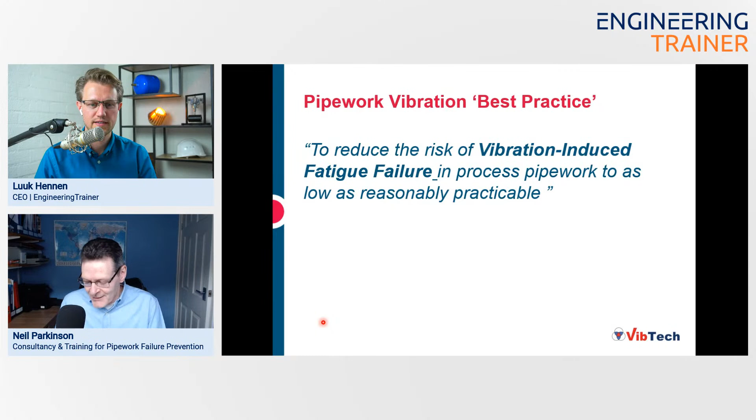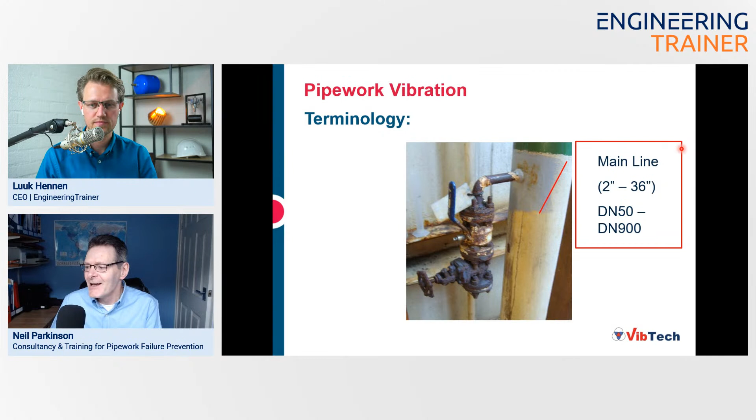Just some terminology which might be useful when talking about pipework vibration. This is an example of a small bore connection connected to a main line. The main line typically would be anything from 2-inch to 36-inch. I apologize for using inches, I know we went metric decades ago, but the small bore is still usually referred to in inches for diameter. When we've got a branch connection, we sometimes abbreviate this to SBC, small bore connection, sometimes called a small branch connection. That's something between 1/2 inch and 2-inch in branch diameter, and this is where most failures occur in pipework vibration. It's not the main lines themselves that fail, it's these welded connections between the small bore connection and the main line.

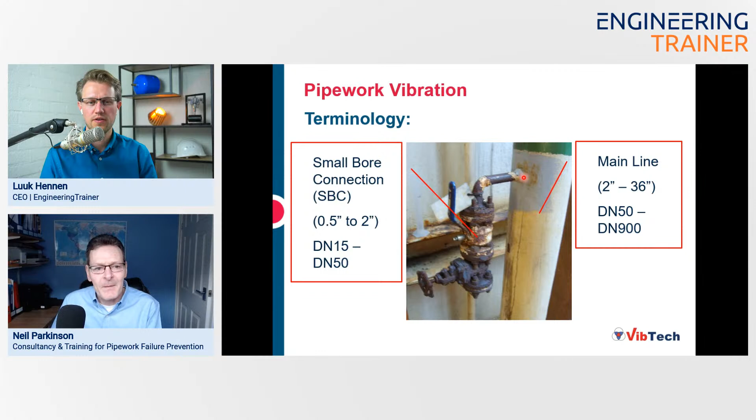This picture shows it perhaps a bit more clearly. We've got the small bore connection, and it normally has a fitting of some type, so a weldolet fitting would be very common. You'll hear that term a lot, but it could be a threadolet, a sockolet, a nipoflange, and lots of different types. It's got a welded connection with some type of fitting, connected to a number of valves, so it's got mass. It's like a cantilever, with a large mass supported just by that small diameter pipe.

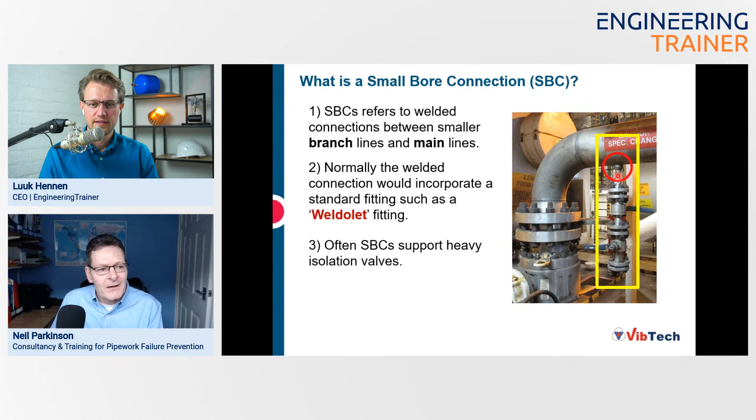Now here's a picture, I'm going to run this video in a second, but this is a motion amplification video, which is very good for explaining the problem. This has been amplified. Motion amplification is a video technique where you record a video where you can't see any movement, then you can amplify that movement and replay the video, showing it with greater visualization.

If I turn off my laser pointer and run this video, you'll see this small bore connection moving from side to side and leaking because of a fatigue crack at that weld. The interesting thing is that everything on this image is being amplified by the same amount, so the main line vibration is also amplified, and even then you can't see it. That's an important point, because some people think pipework vibration only happens with really extreme levels of vibration, so they assume it's probably visual, that you could visibly see it, where in fact you can't. Even when amplified, you can't always see it.

These are small levels of vibration that happen in normal processes. We're not necessarily talking about fault conditions, although it might make it worse, but normal levels of vibration caused by the flow of fluid through your pipes, caused by the type of machinery driving that fluid, caused by the operation of valves. They can cause vibrations of the main line, always of the main line, they don't excite the small bore directly. Could you see the vibration of the small bore connection with the eye? No, that'd be totally invisible. If you put your hand on it, you'd feel some vibration, but you wouldn't see anything at all. You'd need a vibration meter to quantify it, but that's why motion amplification is such a great technique. So these small levels of vibration are caused by normal process conditions which excite the main line, and it's the main line vibration that's causing the small bore to vibrate.

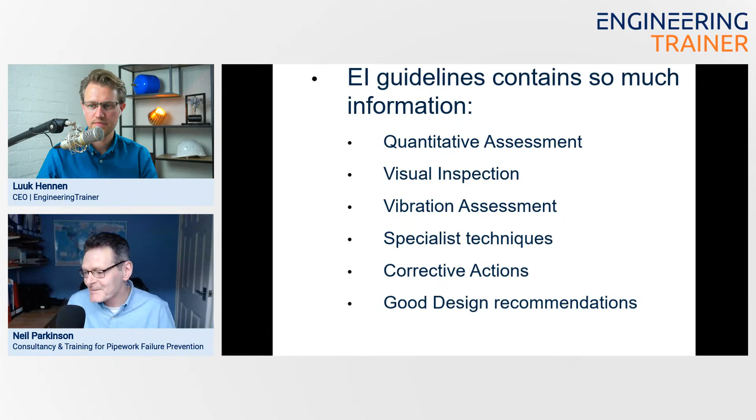Because we're talking about vibration, there are techniques for how to measure the vibration, and how to assess what that actually means. What's an acceptable level of vibration for our pipework? That's all covered in the guidelines.

And then, if you've got a problem, you want to assess it further. Just because the vibration's high, you may still be okay. You have to assess it further using some specialist techniques.

They might be things like finite element analysis, being a very common one. You might want to do some modeling to try and predict the behavior of pipework and look at how I can improve it. If I put an extra support here, is it going to have the effect I want it to have? That sort of thing.

And also it tells you, if you have got a problem with vibration, what are the common corrective actions? What should you be doing to fix it?

And this is a good... Are these likelihood of failure assessments common these days during, let's say, design stages for every meter of pipe? Some of them are.

Routinely, I've been involved in lots of new build projects in the Middle East, and routinely they'll do flow-induced vibration assessment and an acoustic-induced vibration assessment. But that's all they'll do, and they'll do that at the feed stage. But for lots of existing plant, it might never have been done.

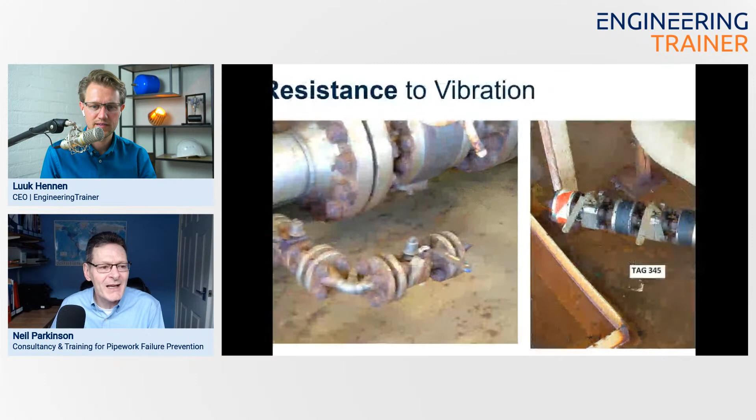There's got to be a root cause of the vibration, hasn't there? There's got to be something that causes it. So it may be that during normal operation, if I measured vibration on one of these small bore connections—there's one here, and there's another example here—they might be perfectly okay. If I put a vibration meter on, the vibration might be acceptable.

But every time you close a fast closing valve, this thing might see a lot of vibration. And that's what Luuk was saying at the start. It could be that it's seeing this low cycle fatigue. So every few days or weeks, it sees some high stresses, which over time can still lead to a failure because it's got low resistance to vibration, which means it's vulnerable to transient events.

Yeah, it clearly looks like a very top heavy section of piping. I mean, you have this really small bore branch, and then these thick flanges and thick valves. It's really hard to avoid coming up with a piping geometry or routing that solves the issue with such a high mass of the valves compared to the thickness of the piping.

Well, it can be difficult, and I think a lot of people get put off by complex geometry, thinking: well, if I had to try and design a brace to fix this—some of these are quite simple compared to some of the ones you might see—it is going to be off-putting.

In actual fact, I'll show you a bit later on some examples of a very easy off-the-shelf solution where, with just 2 dimensions, you can order some bracing that would fit any small bore connection. You buy it as a kit and fit it yourself, so it's actually very easy.

Another thing I should say about these is the vulnerability, we can calculate that using this quantitative assessment tool in the EI guidelines, the likelihood of failure. It uses a number of factors, but what it doesn't use is how many bends there are in this, whereas the bends are actually quite important.

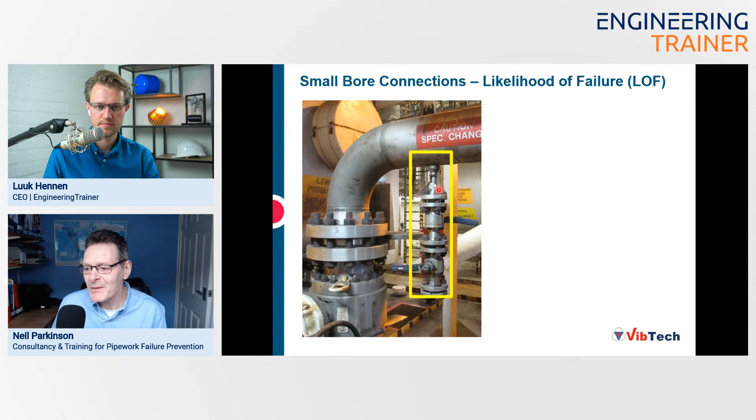But what the Energy Institute lets us do is calculate this likelihood of failure factor, using just 6 parameters. So this is our small bore connection - our valve arrangement on a pipe welded to a main line.

So the main line wall thickness has an effect - the thicker, the better. The type of fitting, I mentioned a weldolet fitting before, that's a common one, and that would have a score of 0.7. You have a score for each of these 6 factors, and then you average those out at the end. The fitting type - some have a better fatigue endurance than others, the weld geometry is different and the fatigue performance is different.

Then the branch diameter - the wider the better. The number and size of valves is important, basically the mass that's supported on this cantilever. And the overall length.

Now actually a lot of these parameters - the length, the mass, the diameter, and the thickness of that parent pipe - all of those same factors are the same factors that alter the natural frequency of that small bore connection. If it's very long with a big mass, a small diameter, and a flexible connection onto a pipe because it's thin walled, it's going to have a low natural frequency. That will give it a high likelihood of failure factor, and a low natural frequency.

And that's why most of the problem vibrations on small bore connections tend to be low frequency ones, because the low frequency ones are the ones with the poor geometry, which make them vulnerable. It's exactly the same effects.

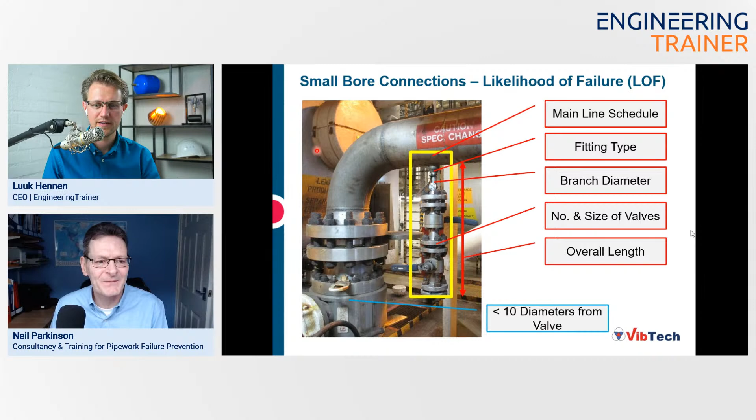So we take those 6 effects, and that will give us our score - that's just how it's calculated for a small bore connection. The next of the 6 is the 4th one I've got here on my list - these are small bore connection braces that are ineffective.

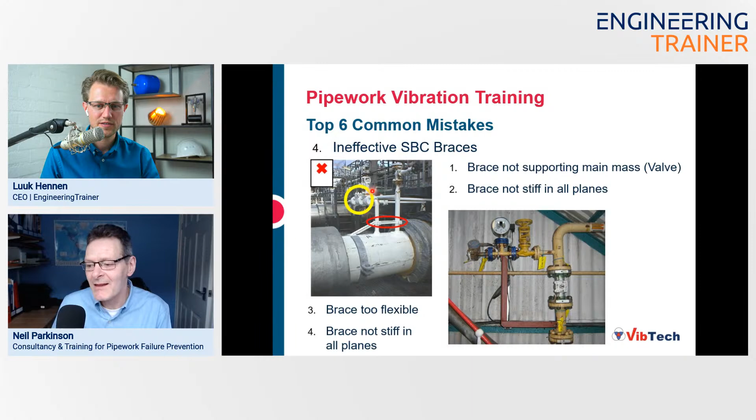So on this left-hand picture here, we can see - could you zoom in maybe a little bit? Yeah, I can zoom in on that. So...

What we can see is we've got a small bore connection with some valves, and the solutions are always the same - we always want to stop the valves moving because that's where all the mass is, and that's where all the energy is in the system. So if we brace it, we always have to brace to the valve, and we always want to tie it back to the parent pipe, the pipe that it's welded to.

Someone's gone to a lot of trouble on this picture to have a clamp-on brace solution here. It clamps onto the main line, and it's got an arm that tries to connect lower down. You can see what they're trying to do. They're trying to protect the welds around that weldolet fitting, like bending at that location. They're thinking, I'll try and stop it moving at that point because that'll keep the stresses low in those welds, but it won't. If this small bore is vibrating, the energy of these valves vibrating will transfer down this small bore connection and into those welds still.

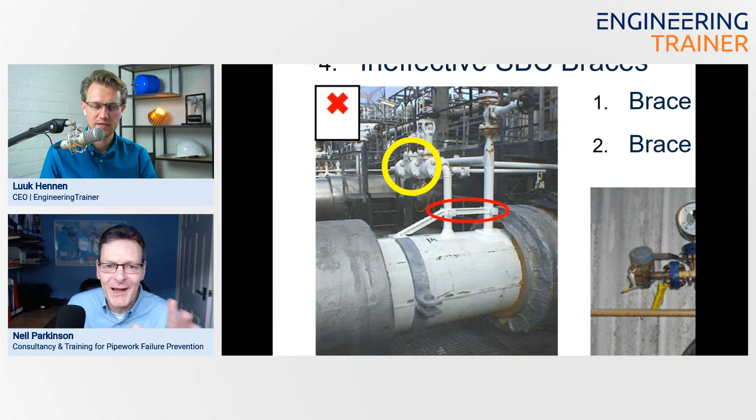But also, if you are going to clamp it, it's got to be effective in all directions, in all planes - for side to side, for vertical, even all the X, Y, and Z planes of movement. It's got to work in all of them.

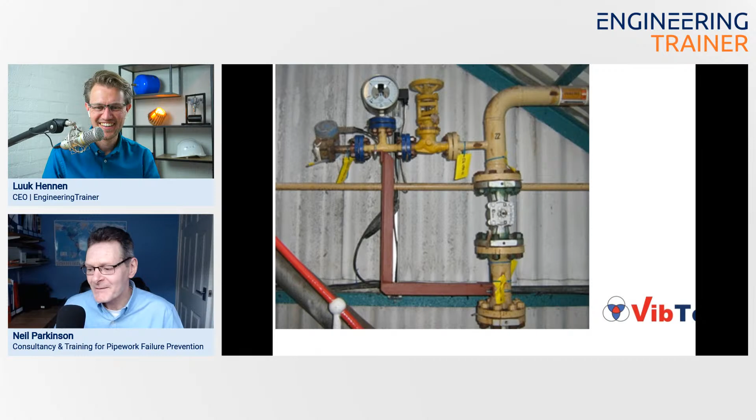This other picture you can see here, it looks a bit pathetic. It's got a brace that's got bends in it. I'll just put the pointer on. It's got a U-bolt connection onto the small bore, and a U-bolt connection onto this - I call it a main line. It's quite a small diameter, but it's trying to stop this valve from moving.

So the vertical red and horizontal red sections, those are the clamps. Someone's designed those, and just like I said, if a small bore connection has got bends in, it makes it more flexible. It's the same for bracing - if it's got bends in, it's more flexible.

What we want to see here is a diagonal straight line. Always diagonal - whenever I see any bracing, I'm always looking for diagonals. If this valve tries to move vertically now, it's got to change the length of this yellow strut that I've drawn on. It's got to load it in tension and compression, whereas on their design, it's just got to load it in bending and a bit of rotation on this U-bolt. So we always want these diagonals to give it high stiffness, but even that wouldn't work in all directions - for side to side, like in and out of the screen, it's doing nothing. So that's an example of one someone's fitted, but it's going to make no difference.

As a rule of thumb, we want our brace to be 10 times stiffer than the small bore connection is on its own without the brace, which means it normally has to look quite over-engineered to be effective.

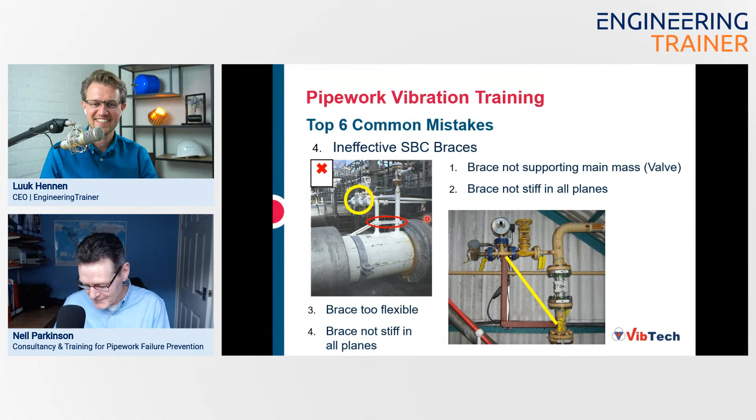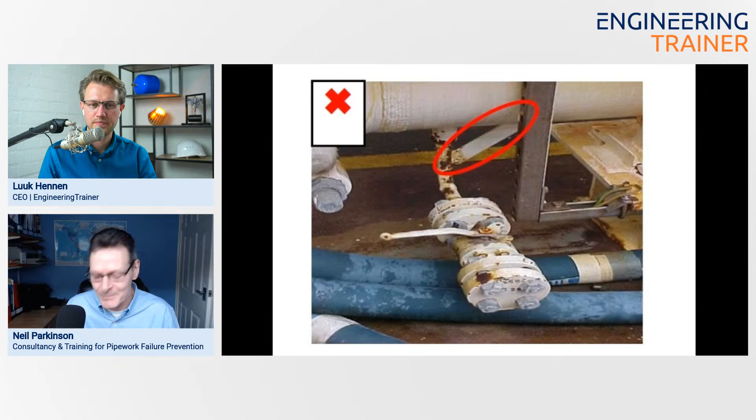You can still have gusset plates - they're not totally best practice now, but I've done something crazy.

Hang on, I'll get you back. Sorry, just bear with me. No worries, take a second. There we go, there we go. Back in the room.

If you have got a welded gusset plate like this one, you need to use a reinforcing plate - that's what the guidelines will tell us, to reduce the stresses in those welds to stop those from cracking. But it's still not effective in all planes; it just means it won't be damaging if you put that reinforcing plate in. The best way to do this, like always, is to support that valve back to the parent pipe - the main line.

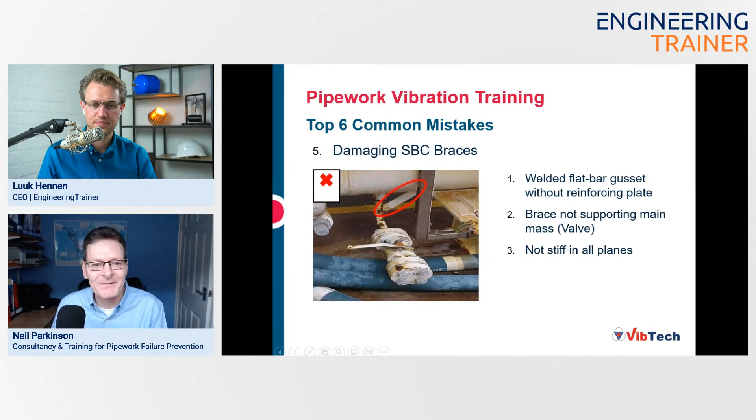Just to be sure, like Neil, we're advancing rapidly in time, as always. Okay, well that's good, but no worries. It's really interesting to discuss these pictures. We have a few slides with pictures, let's focus on these and then start wrapping up.

This is an example of a small bore connection near the ground. They've put a bend in it because there's not enough space for a straight line. And because they want to stop it vibrating, they've fixed it to the ground, thinking, what can be better to stop that from vibrating?

Like an anchor point. If the main line is still vibrating, this is now basically trying to act like a fixed support for our main line, and it will put high stresses at these welded points.

The picture on the right is just the same, just a different example of one of those. We've got a small bore connection that's mounted to an I-frame bar.

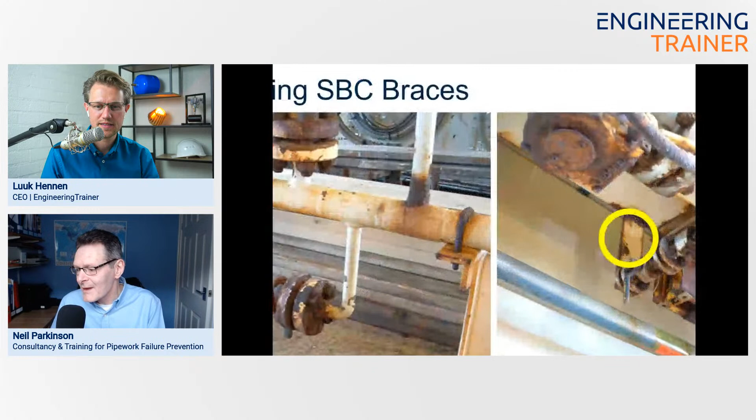They've put this extra steel bracket in that's circled in yellow. So the free end of our small bore connection is now attached to that fixed point, which is attached to a horizontal support beam. But again, if the main line is vibrating and one end of the small bore connection is fixed, that differential movement will cause high stresses in these welds, at that weld and that fitting.

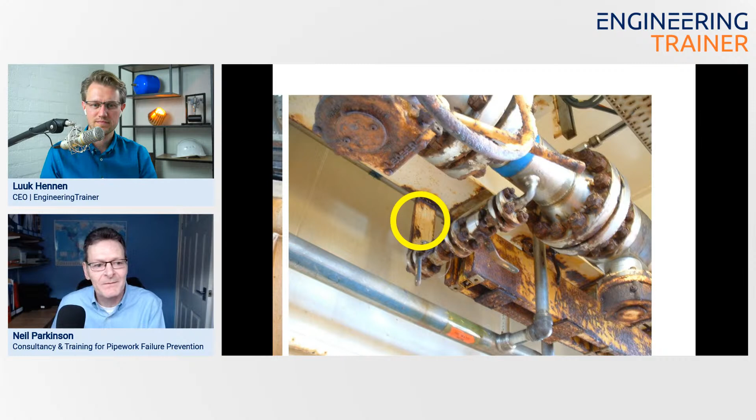Just a couple more slides then. It's an interesting point, just like, how would you solve it? If you go one slide back, Neil, and look at the left picture, what we want to do is, I guess...

We want a brace that attaches to these valves and ties it to that pipe, the same pipe that the small bore connection is welded to. So you'd have a connection across here.

On this other one, I suppose it's difficult because that beam is in the way. That is a very difficult one. But the key for that one would be to reorientate that small bore connection and then fit a brace.

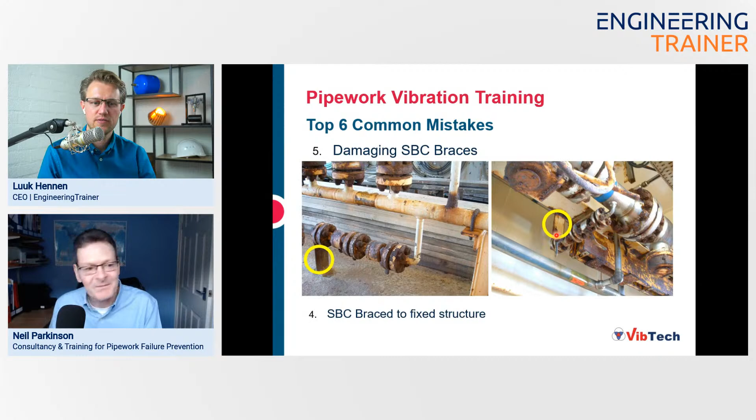I'll show you that other solution in a second, but this is just to make the point that the vibration affecting the small bore connection is caused by the vibration of the main line.

If the main line isn't well supported, like in this case here, this is a sliding support or rest support, but due to thermal expansion, the main line is lifted off, creating a gap. Then you might think your main line is supported every 8 meters, but if you've got one of these gaps, it might now be 16 or 24 meters. You might have a whole section of pipe that's really unsupported, which on paper looks good because you've got support every 8 meters, but in practice it's not good.

So you do need to do that visual assessment to make sure your supports are effective. Another problem that can affect it is where you've got U-bolts with missing liners or clamps with missing liners. It's the same principle: make sure your existing supports are as effective as they should be, and then you might also need to add additional ones.

I'll just quickly move on to show you the solution, since you mentioned how can you do it. This is something I was involved in, where the idea was to make a generic solution that could be used for all small bore connections, specified with just 2 dimensions.

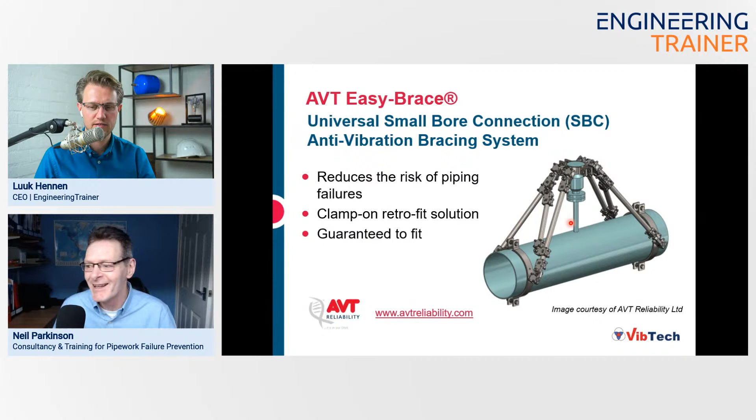To specify it, you just need to know those two diameters, and you'll get those from your isometric drawing. You don't have to go to site or do any measurements. You just need to look at your drawing and say, oh, that's a 1.5 inch, 300-pound valve, so it'll have a certain fixed flange diameter, and that's a 12-inch pipe, and they all have the same outside diameter.

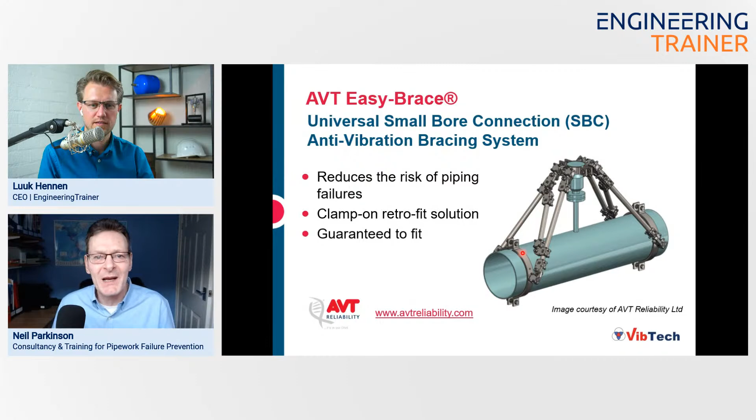So this is like a universal clamp, and as long as you can make it fit on the header, then you should be fine. You basically bolt this onto your valve, and bolt the split clamp onto your pipe, and these arms, these struts, aren't fitted at that point. You then align these fittings by eye as best you can, measure the distance between them with a tape measure, and cut that tube to length on site. It's guaranteed to fit then because you've just cut it to length.

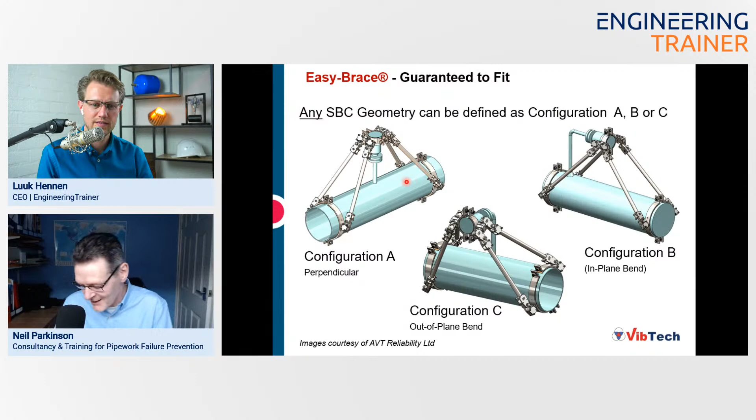And you can have these, they come in a 2-arm version, a 3-arm version, or as shown here, the 4-arm version. The next picture I've got for you is an example of a 3-arm version of this.

So it's just to make the point, it's not always that difficult. Even if the geometry is complex, solutions exist. This is one solution, you might find others similar, but solutions exist that do exactly what the Energy Institute says, which is to tie this mass, the valve on our small bore connection, back to that parent pipe.

Nice, thanks for showing. So just one question to wrap things up, I mean we're a little over time so we'll have to start wrapping things up. Neil, no worries, I mean there's interesting images to discuss. Like I can imagine that.

Well, coming from a pipe stress background, there's always a bit of a discussion about gaps in pipe supports, right? What is acceptable during installation, etc. How do you deal with that from an analysis point of view? I can imagine that since the amplitudes of these small bore connections, the vibrations can be really small, not even visible to the naked eye. You just mentioned the clamps.

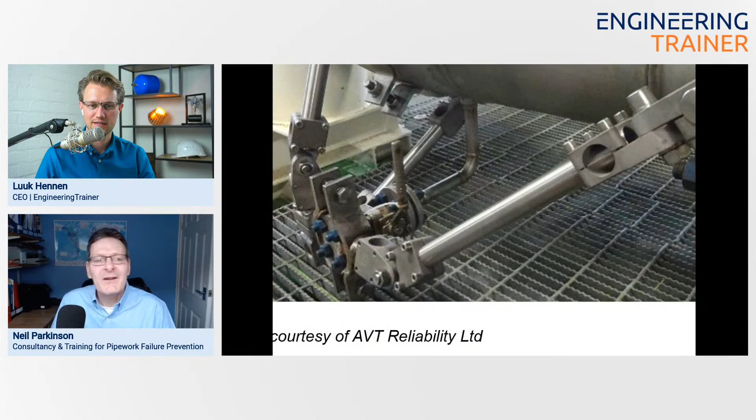That easy brace example you can see here uses Nord-Lock washers, I don't know if you've heard of those. It's an anti-vibration washer on every single fixing. Yeah, you need to take those types of things into account. I think you'll be able to see them on this picture, it's not enough detail, but it's because if it needs bracing for the integrity of that small bore connection, then you need to make sure it doesn't vibrate and fall off a month after you fitted it. It's got to be a permanent solution.

Well, thanks Neil for sharing your insights on these, especially on these small bore connections. I've been involved with vibrating piping systems, but those were more the header type vibrations due to water hammer, etc. So this was very insightful for me, at least, about how to deal with those small bore connections.